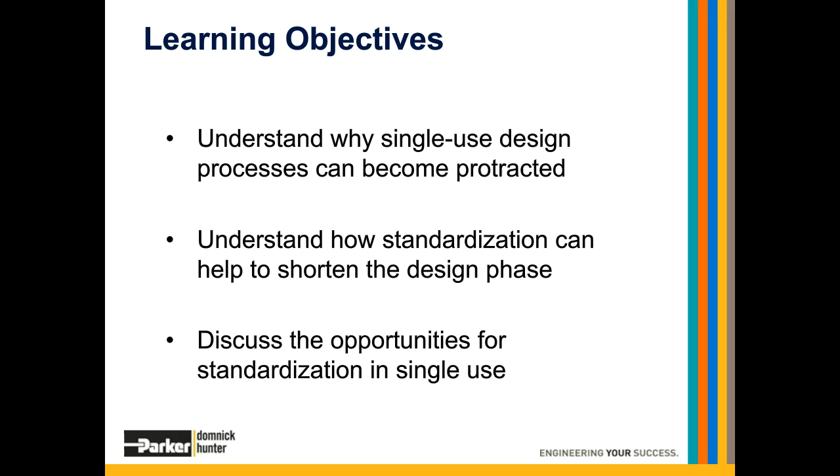Single-use technology has been with us for just over 20 years. It started out as a simple bag for holding buffers or cleaning solutions. Over time, single-use has evolved and developed to such an extent that it is now possible to run an entire process in a single-use format. The benefits of single-use have been widely discussed and are well understood. Some examples of these points are on the screen.

One of the key benefits that is often mentioned is speed to market. The speed that it refers to comes from the quicker build time for facilities, faster turnaround times between batches, and lower validation requirements as you have eliminated the need for time-consuming cleaning and sterilization validation. Single-use technology is enabling products to be brought to market faster and more safely than ever before. However, there are still challenges for single-use, which leads us to our first poll question. So back to you, Chance.

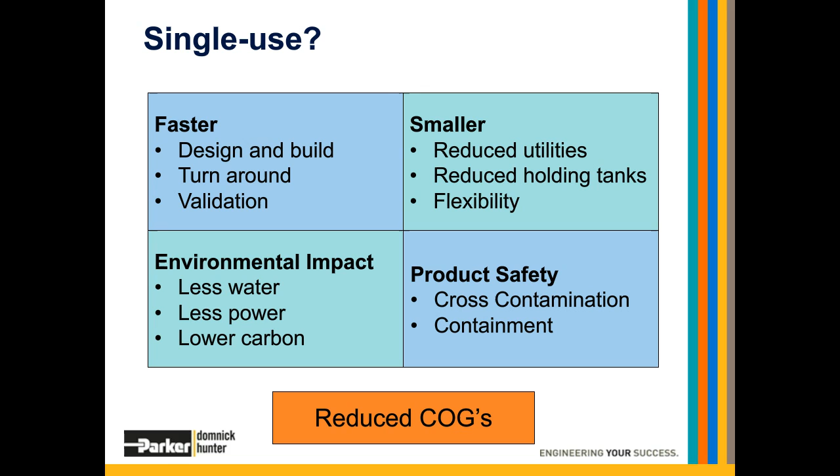Excellent. Thank you very much, Guy. So it is now time for our first polling question. Now you can pick more than one option here, so please make sure that you pick all of the answers that are relevant and then press submit to log your response. So this first question is, what challenges do you still see in single-use implementation? Do you see time to implement as a challenge, scalability, validation requirements, cost, or your final option here is automation? So again, please select all of the options that are relevant and then press submit to log your response.

So I'm just going to give you a few more moments to vote in this poll and then we'll move on to view some results. Okay, thank you to everyone that's responded so far in this poll. Let's move on and view the responses. So it does seem that we have quite an even spread across the board there, Guy. Is that what you were expecting from this poll?

Yes, those results are certainly interesting, and they kind of reflect some of the discussions we're having at Parker Domnick Hunter about where we should be focusing our resources as we look to further develop our single-use offering.

If we now start to look at the single-use market, what has the message to end users been over the years? In essence, it has been have a customized solution for every unit operation, for every scale, for every product.

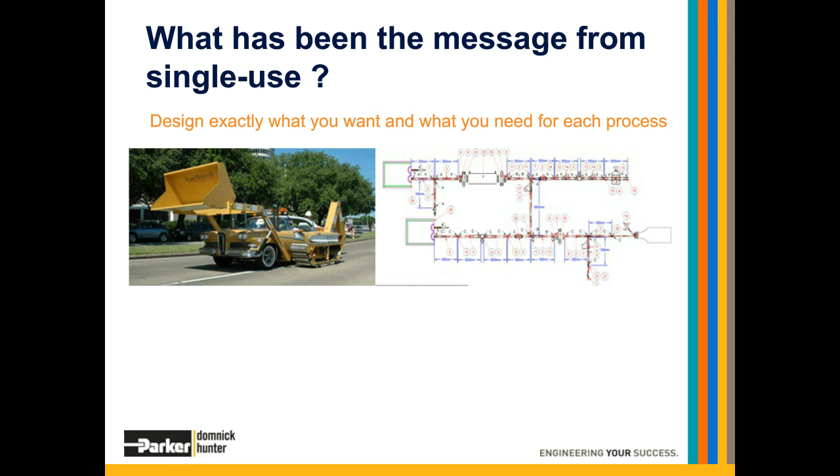For example, there was a report of one biopharma organisation having over 2,000 different assemblies in use, although it must be said, through rationalisation, this was subsequently reduced by about 80%. Such high levels of customisation also mean that organisations have to stock and control a large number of low-volume items, including managing and writing off, where necessary, expired stock.

Another challenge is that lead times for products are increased by the need to have lots of small volume production runs. Like any facility, there is a requirement for a changeover process in between products. So having to do that more frequently to accommodate small batches will lead to increased lead times.

There are potential quality challenges as the larger the production run, typically the lower the error rate when compared to small production runs of complex assemblies involving custom parts. Although these errors should be caught by the vendor's quality systems, they will still result in increased lead times as rejected products either need to be reworked or manufactured from new.

Ultimately, higher costs will result due to the time required for designing, testing, and the management of single-use systems. All these factors will add up to longer implementation times and potentially higher cost of goods.

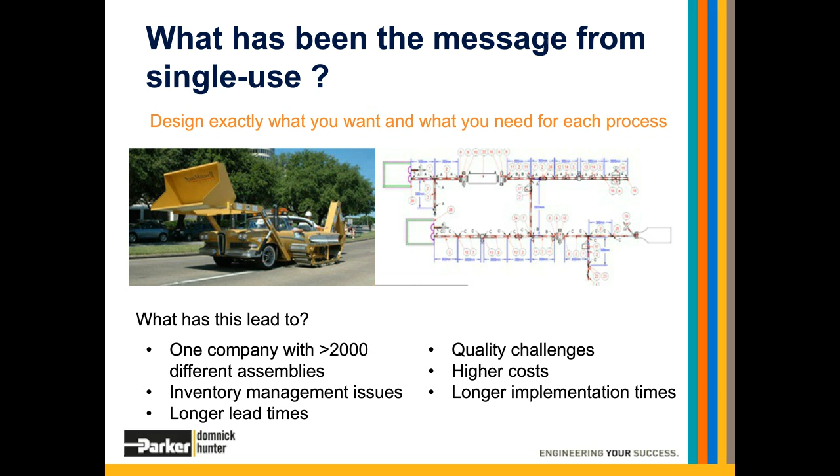So why is customization a challenge, and how does it lead to longer implementation times? Well, imagine a scenario where you have a project running and a need is identified. The solution to that need is a customized solution that may involve a part that has not been used in an assembly before. So the end user approaches a single-use system supplier.

Now, as much as a vendor wants to support their customer, there is a bar over which any item must get before it can be built into an assembly, and gathering this information can take time. As a bare minimum, we would need to know that the product is safe to use, is gamma stable, and has the right quality documentation available. Then, as a supplier, we should ask, is the supply chain robust?

Is it able to deal with the demand of going from a low-use item, for example, in a process development facility, where maybe one or two is used every other week for a short period of time, to one used in full-scale GMP manufacturing, where the demand could be several devices per week over a sustained period of time?

We should also be asking, does it fit with the manufacturing capabilities of the site? Or to put it another way, is the site equipped to handle the components being designed into an assembly? And finally, the management of parts and components, not only to ensure the timely supply, but also to minimize waste. For example, if there is a minimum order quantity, how does that fit in with the demand for an assembly?

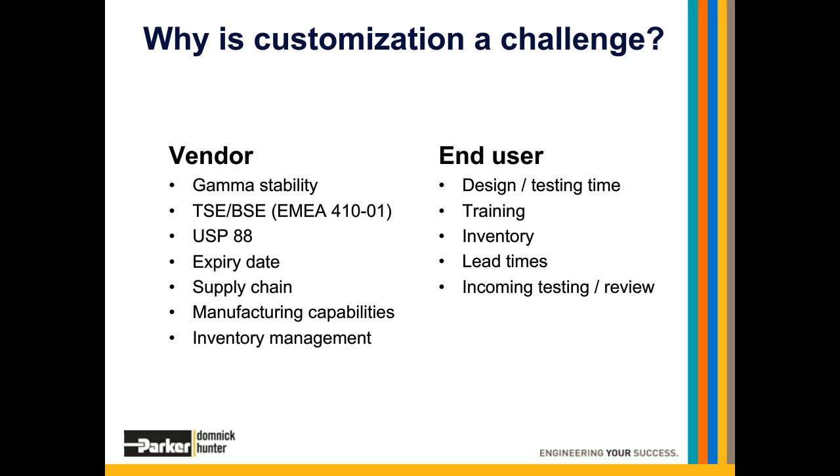We are not proposing what Henry Ford said. In fact, the days of a process being made to fit into a plant should be long gone. However, lessons can be learned from the automotive industry, where literally hundreds of different cars can be built on the same production line based around a standard configurable package.

To carry the analogy further, the resulting car can be used by many different people, and the people building it have the right skills, but they are not reliant on specialist knowledge. The process to build and maintain that car, the car that is being produced, is well understood, and while it does require training, is not at a super specialist level based on years of experience.

There will always be a need for configured solutions, but it should not be so process-specific or highly customized that it relies on some form of special knowledge to manufacture the assemblies that are used in a process. The end user will always own the process being run, but the single-use supplier is responsible for ensuring the product is fit for purpose, not only from a performance and regulatory point of view, but also ensuring it can be manufactured at the same quality and timeline today, tomorrow, and in years to come.

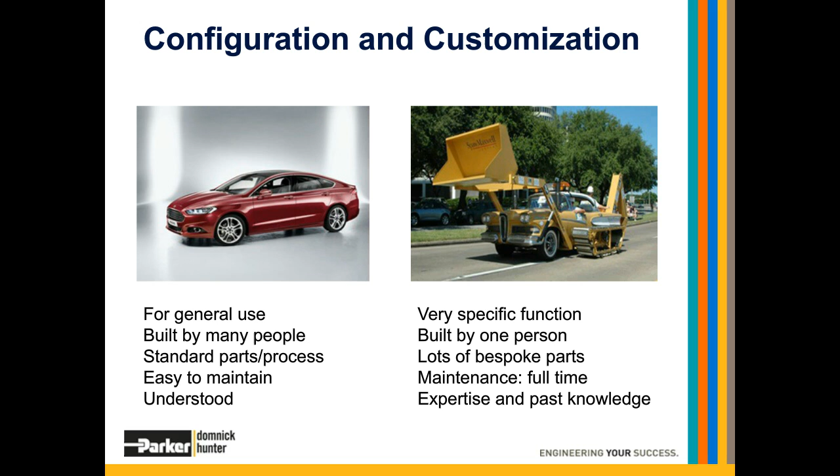So as an industry, we should move away from custom solutions to configured solutions based around a validated design space. If we're willing to make that compromise, what could we gain? Three things: time, performance, and quality.

Time. When speed to market is key, time spent refining drawings, waiting for samples, and then ultimately final product is time that's simply not available to a project. It would be better spent working through the process development cycle or making the product in question. So we should look to make this process as time efficient as possible.

Performance. Prior to implementation, you need to know that the systems are compatible with the solutions being used. They will meet the characteristics required for flow at a certain temperature and pressure for a certain processing time, while having confidence that the supplier knows how to build the assembly and it is supported by a robust supply chain. Too often delays are caused not by manufacturing capacity, but by the availability of components.

Quality. Any material used needs to meet the quality profile with the right documentation in place to support it prior to it being included in any design. You cannot do this without some controls being in place around how something is designed, built, and tested. These controls should ultimately lead to the development of the design space from which assemblies are built. In essence, as the end user, you keep your focus on developing your process or making your product rather than designing single-use assemblies. Which now leads me over to poll question number 2.

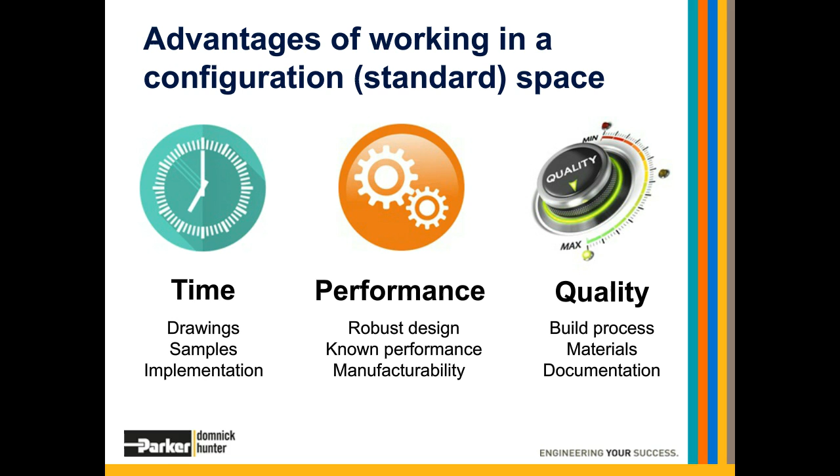So it is now time for our second poll question. Again, you can pick more than one option here, so please select all of the options that you agree with and then press submit to log your response. So this question is, what should be standardized? Should it be testing and documentation, design, for example, standard lengths and fittings, the materials, for example, fluid contact layers, or finally how an assembly is built, for example, with connectivity? So yeah, just pick all of the options that are relevant for you here and then press submit to log your response.

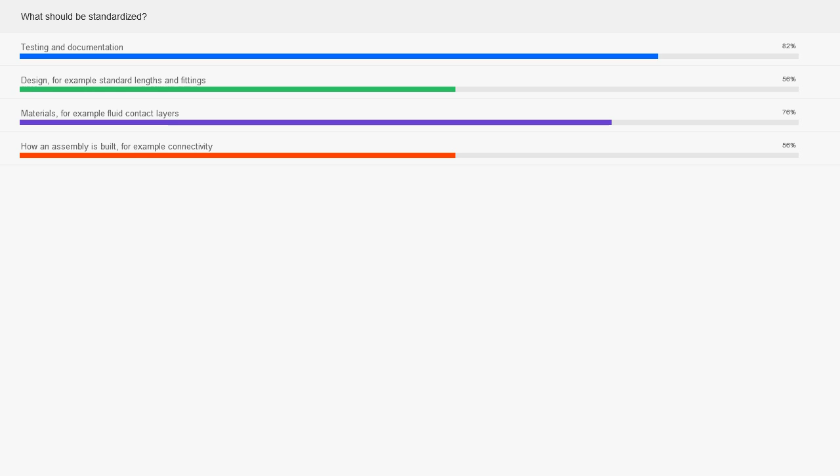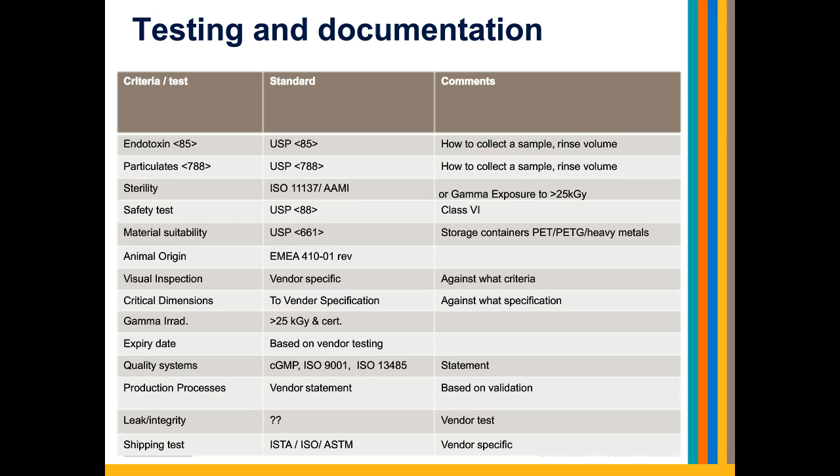The leak testing and how it is done is something that's being developed by different vendors with regards to when the test should be done, what pressure the testing should be performed at, what a fail looks like, and what a pass actually means. If we carried out a survey of different organisations' approaches to these two sets of tests, namely endotoxin and leak testing, we'll see quite an interesting set of results.

The good news is that if you look at the work being done by groups like BPOG and BPSA, there is a move towards standardization of testing, which would certainly assist users in assessing what these tests mean when they appear on certificates of quality, but also make a like-for-like comparison of assemblies possible. Ultimately, standardization here will give the end user more confidence in what is being delivered, which leads me to my next poll question, and over to you, Chance.

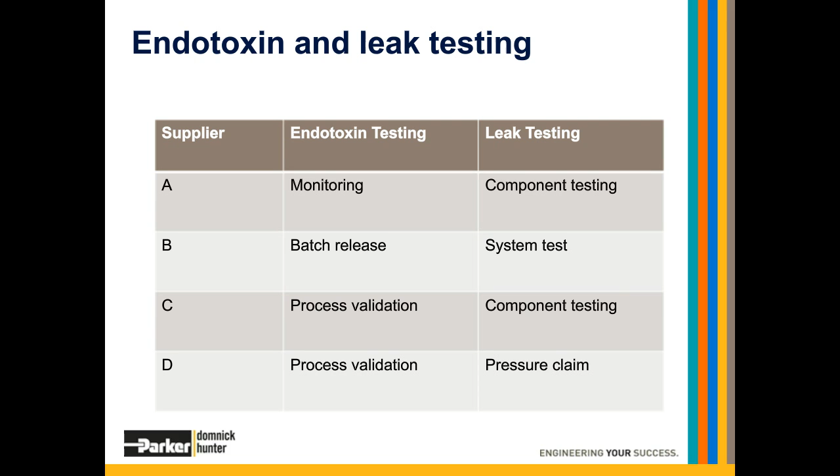Excellent, thank you very much again, guys. So this next poll question, you can only pick one option here, so please select the answer that you agree with most, and then press submit to log your response. So who should be setting the standards? Do you think it should be the end user QA departments? Should it be vendors? Should it be regulators? Should it be industry bodies such as BPOG or BPSA? Or do you think it should be all of the above? So again, please select the option that you agree with most and then press submit to log your response.

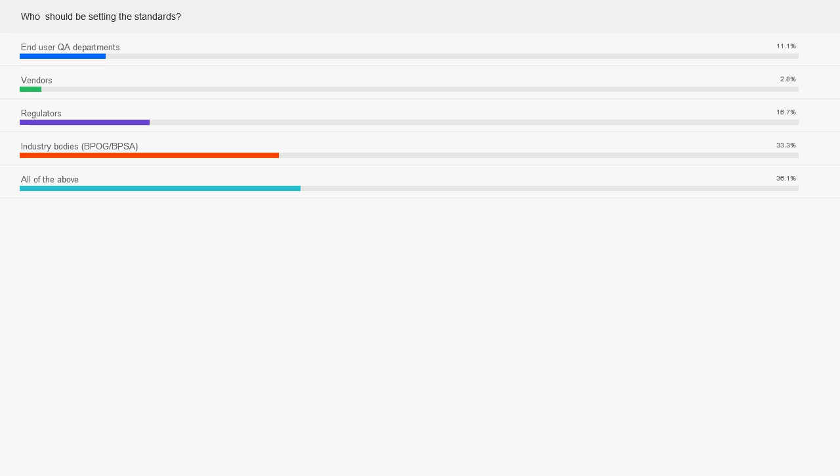The role of the single-use supplier is not to tell the end user how to run their process, but to work with them to create a solution based around the best available technology in their toolkit. The end user owns the process, but the vendor should be responsible for the design, build, testing and documentation of an assembly. As the complexity of a system goes up, so will the need for standardization.

But this should be kept to a minimum of sizes to avoid having to stock multiple assemblies that do fundamentally the same task. Are we anywhere near the ideal situation of being able to standardize assemblies in this way? Well, I would say yes for some of the more complex systems, but if I take a fairly universal unit operation, namely sampling, we will see a different story.

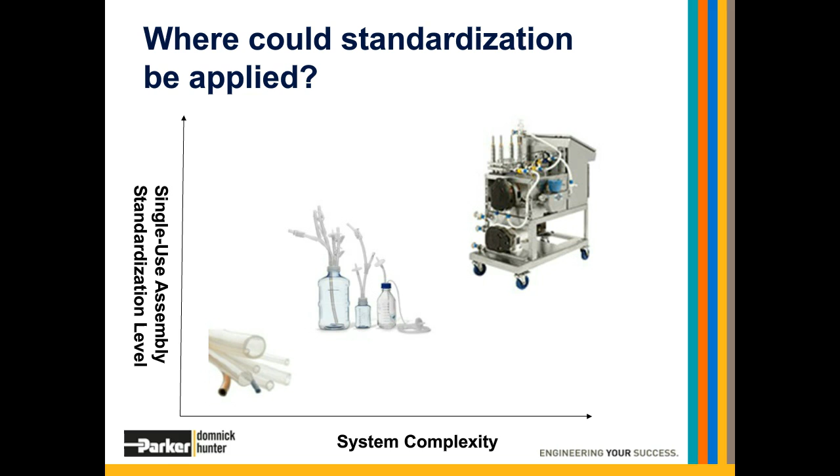Now there is work being led by the PM group in Ireland looking at exactly how simple unit operations like this can be standardized. But as an industry, we are still some way off having a standardized approach. In fact, if I go a level deeper and look at how an assembly is actually put together, as an example of how a piece of tubing is secured onto a barb fitting, we will see just how far we need to go.

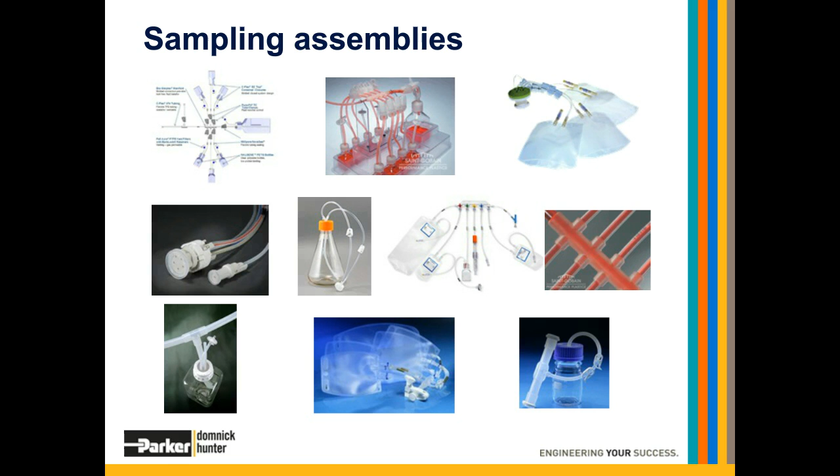But by working within a configuration-based design space, this should not even be a point of conversation, as the vendor would use the fixture of their choice based on the process requirements, with that choice supported by a validation package. So given the range of designs available for one unit operation and the different ways of sealing a tube onto a hose barb, it raises the question of, is standardization even possible?

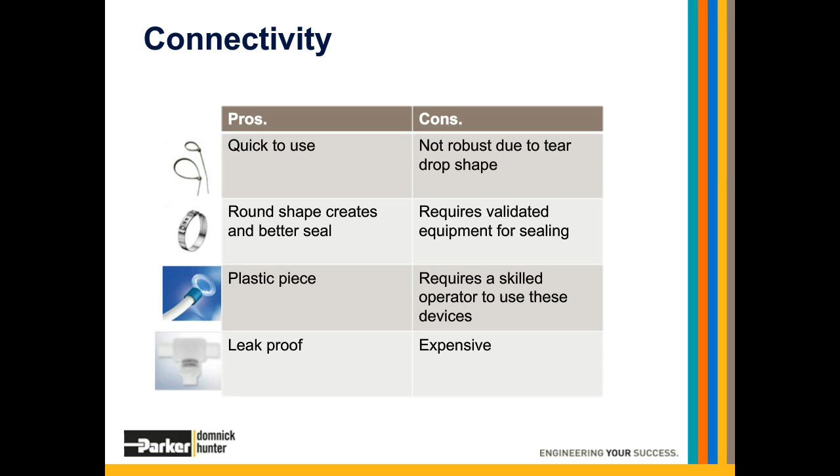I would answer yes to that, and I believe history proves it. If we were talking about a stainless steel project, the material most likely would be 316L, which would be supported by a 3.1B certificate, and connections would be made with a triclover type fitting. In this instance then, time would be spent on making sure the vessel in question is correctly specified for the unit operation and not on the materials of construction and how something is built. And more recently, if you think about that company with 2,000 different assemblies, this was reduced by 80% through a process of standardization.

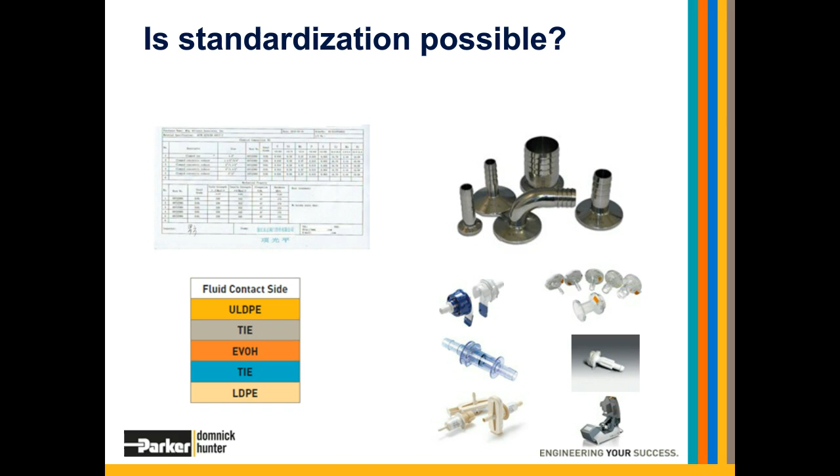However, in the single-use world, we are still discussing the film and the contact layers and what could and could not be used in a process based on past experience. Well, the last time I looked, there are at least 6 different ways of connecting 2 tubes, which leads to the next question, and back to you, Chance.

Excellent, thank you very much, Guy. So this is now our fourth and final poll question that we will be running in today's session. So the question for you here is, could we get to a position where ULDPE could be regarded in the same way as 316L stainless steel? Do you think yes, it could? Do you think yes, but 10 years down the road from now? Or your final option here is no, never. So please select the option most relevant for you here and then press submit to log your response.

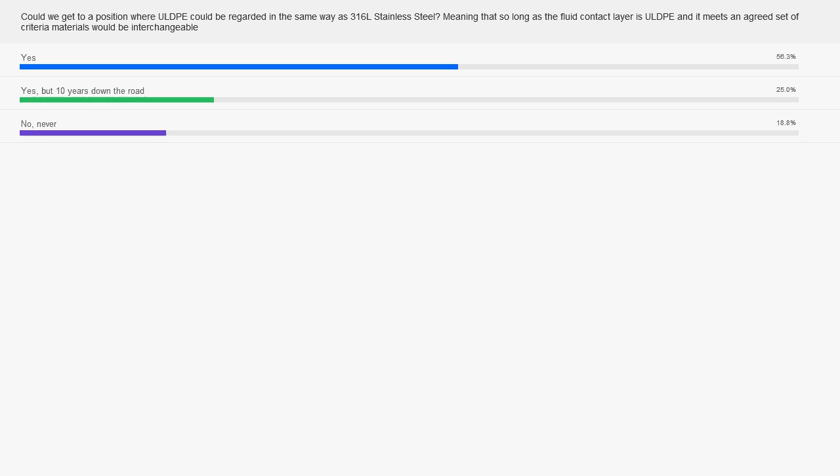Now a design space itself shouldn't be set in stone, it should be dynamic but controlled. Before something can be added to the space, we would need to know or have available the documentation required to support the products in a biopharma process. Equally, if an item is not being used in assemblies, it should fall out of the design space to ensure that the focus is kept on ensuring the quality and supply chain of the materials that are used.

The vendor should have audited the supply chain and have supply agreements including change control in place to ensure the long-term availability and quality of parts. They should also have performance data available and know that it can be used in manufacturing. Putting this sort of process in place should allow us to design, test and supply assemblies to our customers quickly and efficiently while allowing for process flexibility. It will also mean that the end user can keep the focus on the process of producing biopharmaceuticals.

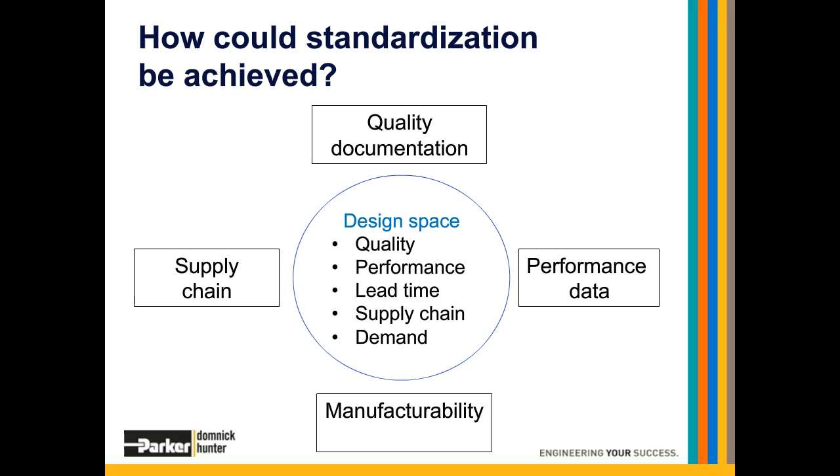All this activity, the development of the design space leading to the rapid design and supply of assemblies, will take place in our facility in Birtley, County Durham, UK, with manufacturing taking place in our newly commissioned clean room on the same site.

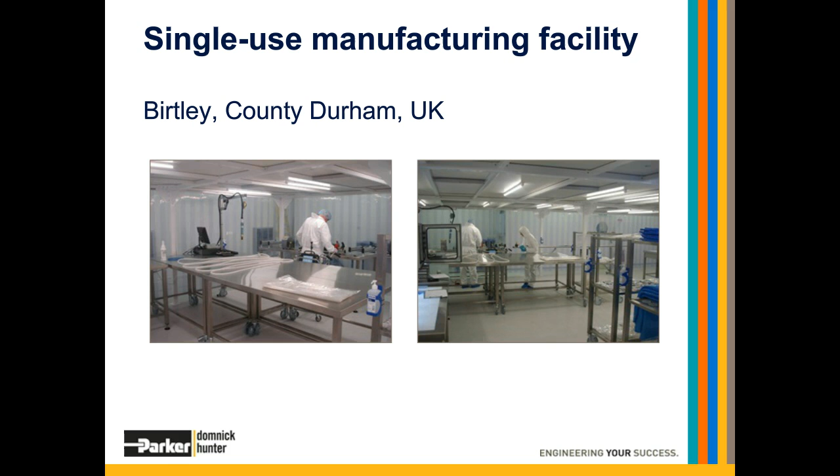So, if we are moving towards a design space, what does this mean in practice? Well, under the old way of working, a customer has an idea and they speak to a vendor. A sketch is submitted, and around about 2 weeks later, a design drawing is issued. Then each revision can take a further 2 weeks. So even with 2 or 3 drawing revisions, you can start to see how a project can become protracted. Add to that, if samples are required, the timelines can begin to really stretch out.

Finally, once a design is agreed and an order placed, finished goods can be anything from 12 to 20 plus weeks. So as a minimum, 12 weeks, or in worst case, an open-ended process, depending on drawing revisions. Now, by putting in place the design space concept we have described today, the drawing and price will be available within 72 hours. Any further drawing revisions would take around 72 hours. Samples could be provided within a week, and finished products in about 8 weeks. So all in all, about 10 weeks in total, resulting in a significant time saving and keeping the focus on where it should be, namely producing products.

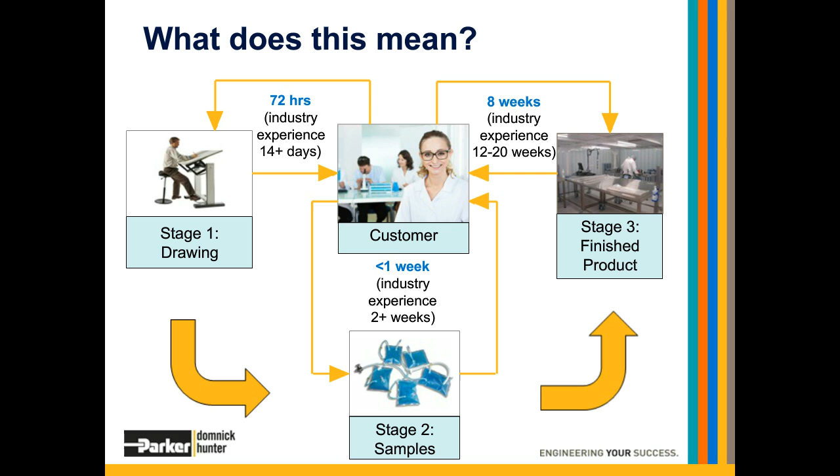So what are the advantages and opportunities for standardization? Well, standardization will reduce cycle times and lead to more robust systems, both in use and from a supply chain perspective. For less complex systems, the standardization opportunity lies in the components used, but customization will be required to some extent as different lengths may be needed. But if you take the example of a simple transfer set, regardless of if it's 1 meter or 10 meters, you are still securing a tube onto a barb fitting and sealing that. So the impact of any customization should be minimal.

But again, care should be taken not to create too many different lengths resulting in multiple assemblies for what is basically the same task. Finally, standardization will result in lower costs of goods through quicker implementation of systems, lower training requirements, and better inventory management.

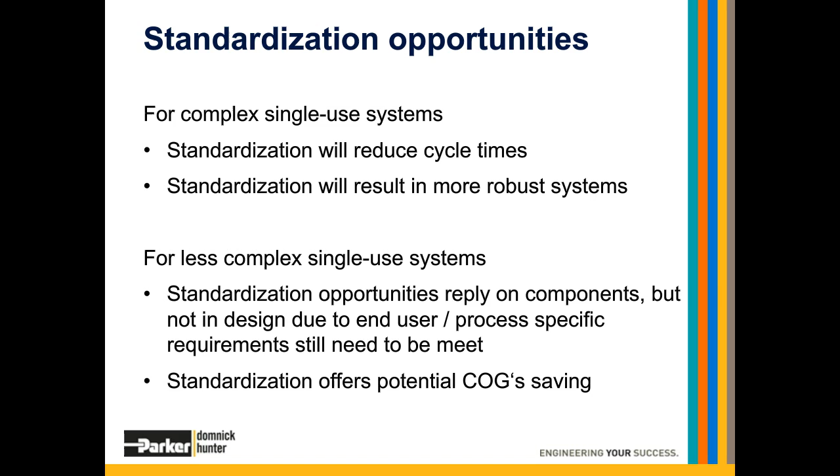So in summary, after 20 years, single use is here to stay. As the industry matures, we need to standardize systems, components, and designs, along with manufacturing and testing methods. The key message I want to get across in all of this is that the processes belong to the end user, while the vendor has responsibility for the design. By standardization, we should free up the end user to concentrate on process development and producing the product, namely life-saving biopharmaceuticals, rather than having to focus on being a design engineer for single-use systems. The way to do this is by the creation of a dynamic design space that allows for the rapid design, testing, and manufacturing of configured solutions.